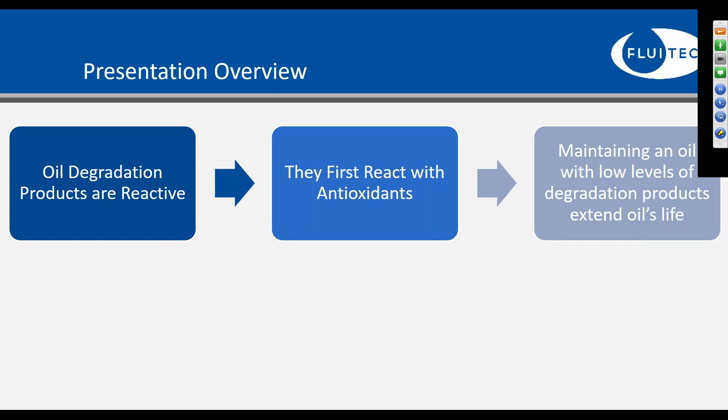Predominantly, we first see these degradation products reacting with antioxidants, and so the premise here with my hypothesis is that if you are able to maintain an oil with a low level of degradation products, you should be able to extend the life of the oil. So that's kind of the hypothesis that I'll work through. What I will present today is a little bit about oxidation and how it creates radicals, and a little bit about the chemistry and degradation of varnishes, sludges, and other deposits that are formed.

Talk a little bit about bleed and feed and some of the impacts that we see with these reactive products. And I'll end this with an experiment that we did where I tried to at least conclusively show that there is a reactive nature to these oil degradation products here as well. So, all right, without further ado, we'll get into this.

To start off with, why do we care if oil degradation products are in fact reactionary? And I think the main reason is that if you have oil degradation products, varnishes, sludges in your fluid, and it's shortening the life of the oil, then there's a pretty solid economic impact that it can have on your bottom line.

So I have a couple of quick case studies to review this, and I think the first time that this really became evident to me was many years ago. I was working on a system on a large ship that uses a controllable pitch propeller, and this is a pretty complex lubrication system that both steers and propels large ships.

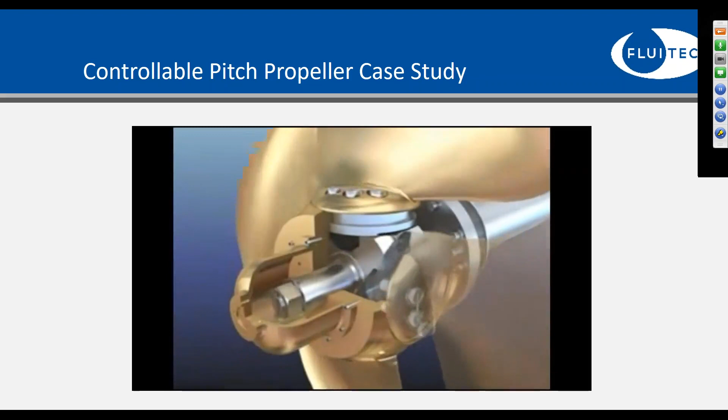And so in this case, the oil was an R&O oil, fairly unique chemistry. There was also a little bit of an EP package in this as well. But the oil was changed every time the acid number hit 0.2. And so a brand new system, the ship fresh out of the dry dock, the oil lasts for 5 years. They change the oil out. The next charge of oil lasts for 3 years. And then the next charge of oil lasts for a year.

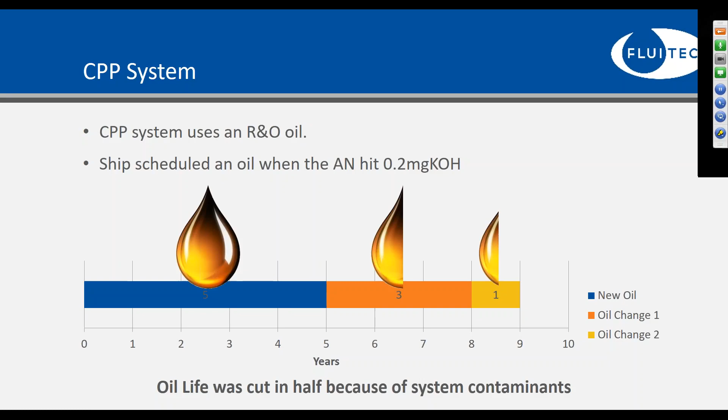And so clearly there was some concern that, right off the bat, this oil should be lasting a long period of time, and now it looks like there's a half-life. Every oil change, the life of the oil is basically cut in half. And then what was revealed is that there was no maintenance done whatsoever in between oil changes, and basically they were putting nice fresh new oil into a pretty dirty system with lots of deposits. And so this was maybe the first time that I came across this.

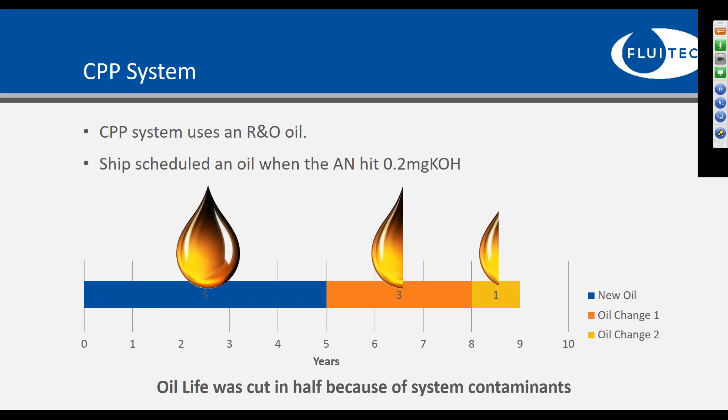A more recent case study in a large frame gas turbine where the oil was clearly at the end of its life. Typically in turbine oils, when the antioxidants or the oxidative stability measured by RPVOT gets down to 25% of new fluid levels, that typically is a sign the fluid's reached the end of its life. And so you can see here the antioxidants, in this case the phenolic antioxidants, 28%. We're getting pretty close to the end of the life of the fluid.

The varnish potential, measured by the MPC, is fairly high. 58, I would say, is certainly in the critical range and is somewhat alarming. Foaming characteristics: in a turbine, typically when you have foaming of greater than 450 milliliters, that would also be considered condemning. So even RPVOT was approximately 25% of the new fluid. In fact, if we compare to the new oil, the new oil had an RPVOT of about 1,600 minutes. So in this case, they dumped the old oil and recharged it with brand new oil.

1 week after the oil change, the phenolic antioxidants are at 74%. And the MPC is also rising and is much higher than should be expected after a week. Foam levels are higher, even the RPVOT has gone down. So in this case, the plant did no clean out of the reservoir or flushing of the system, and basically we're dumping fresh oil into a pretty dirty system, and you can in fact calculate how much it costs to make this whole oil change.

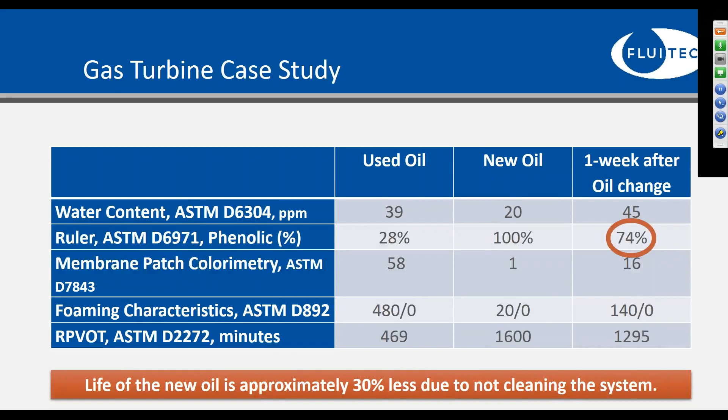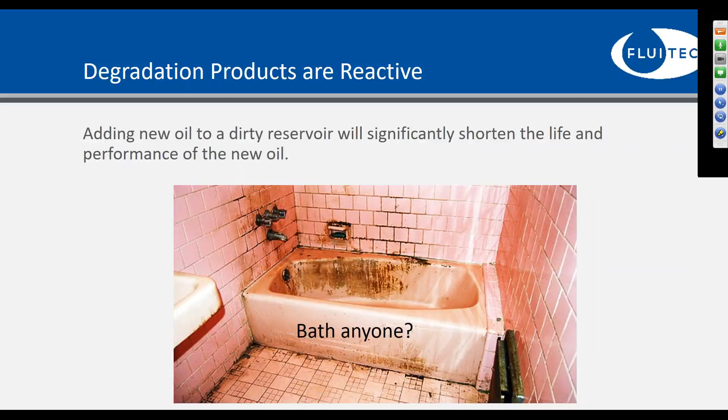So I think this is one of the reasons that we wanted to better understand and study this a little bit more. One analogy that I often use is that you wouldn't want to take a bath in a dirty bathtub, and clearly it does not make sense to put brand new, fresh turbine oil chemistry into a dirty system, especially when we see there are reactionary byproducts as well.

All right, so a couple just quick case studies here to start things off. We'll talk a little bit about oxidation. So now I'm going to see if I can kind of prove out this theory that these degradation products are in fact reactionary. I think you'll see here there's lots of observations we have, and theoretically there should in fact be the creation of radicals or these reactionary products as the fluid degrades.

So if we just look at oxidation, which is the predominant mode of aging and failure for most industrial oils, if we look at just the basic chemistry behind oxidation, you can see all of the various different products that are formed. Many of these are in fact radicals. Free radicals are typically unpaired electrons that have a very, very short life. In normal oil analysis, you're not able to identify a lot of these.

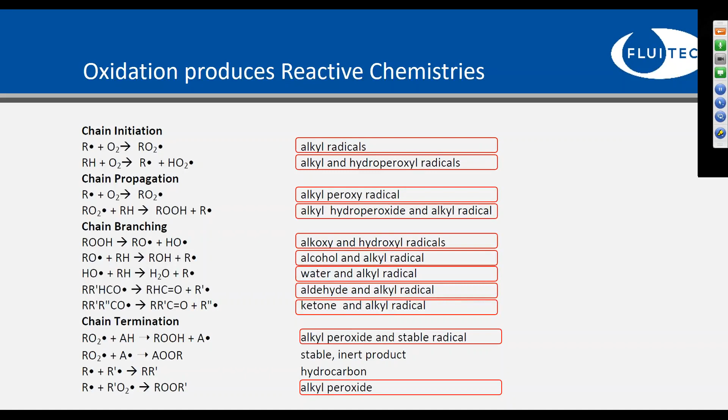Some of these radicals are more stable and can actually reside in the oil for an extended period of time. Some radicals are so stable that you can actually measure them with some used oil analysis tools like infrared analysis. But in most cases, free radicals have a really, really short life. So one way of determining whether or not there are in fact free radicals, or this is just a theoretical academic exercise here: can you actually measure free radicals in oil?

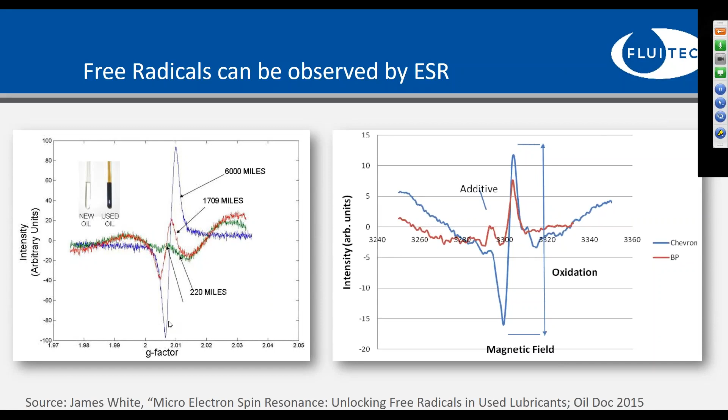And as you start to age the fluid and there's more miles on the fluid, you see at 6,000 miles, there's clearly some free radicals here that are able to be detected. So free radicals do actually exist beyond the academic exercise of understanding the process of oxidation. They do actually exist in oil.

So let's talk a little bit about some of the deposits that we typically see in lube oil systems and understanding whether or not those may be reactionary. So in order to do that, we have found that there's a lot of value. One piece of advice that I'd like to share that we always discuss with our customers: anytime you ever have an opportunity to get inside your lube oil system during an outage, it represents a tremendous opportunity to see what is going on in the system.

Unfortunately, in most cases, you can't actually see lubricants working and functioning. You can't see the wedge that it builds to separate moving parts. During outages, when you have an opportunity to get inside a system, photograph a system, make observations, there's all sorts of things that you can detect. And often, if there's accelerated oil degradation, you'll find the evidence of that through deposits that are in the system.

And these deposits can come in a very wide range of different shapes, sizes, consistencies, colors, but if you have the ability to capture and collect a deposit, there's a lot of value that can be derived from analyzing that. And certainly TestOil has a sophisticated analytical program to basically dissect and determine the chemistry of the various different deposits you may find. Typically, when you are doing deposit analysis, we like to think of this as a method of extracting deposits either from the oil or ideally actually having a physical deposit from the system.

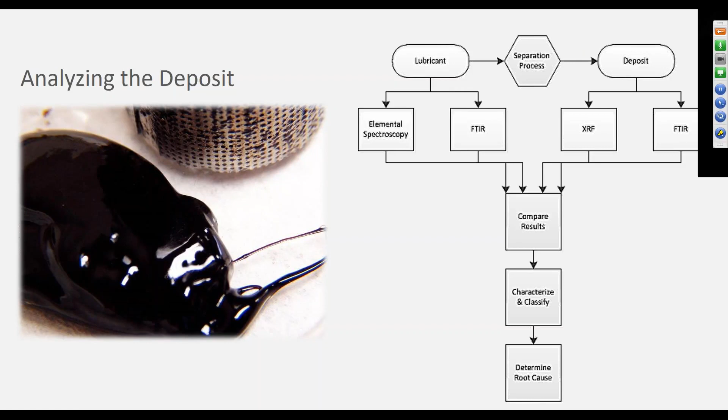Well, so that's fairly interesting, but I think even more powerful than that is that once you're able to extract the chemistry out of these deposits, in many cases, you can actually go back and determine what the source of this chemistry is.

So, for example, this little glob you see on the left-hand side of the screen, this is something that we would refer to as a thermoplastic. It's a really cool type of deposit that if it's cool, it's solid. If you heat it up, it will melt and turn into a liquid, but this solid piece here, if you actually just drop that little piece on the floor, it could actually shatter like glass, and it really behaves like a thermoplastic. This is a type of deposit chemistry that we typically see, for example, in spark-derived lubricant deposits.

If there's a very high amount of spark discharge, it would make this fairly unique chemistry that we haven't seen from other modes of degradation. So just to let you know, this is a powerful tool to not only say we have an organic deposit that's come out of the fluid that looks and behaves like a thermoplastic. Well, we also now know that it's derived from spark discharge, and there are known ways of being able to remove spark discharges that may happen in your lube oil system or in your filter system. So it actually allows you to go back and correct some of the root cause of this.

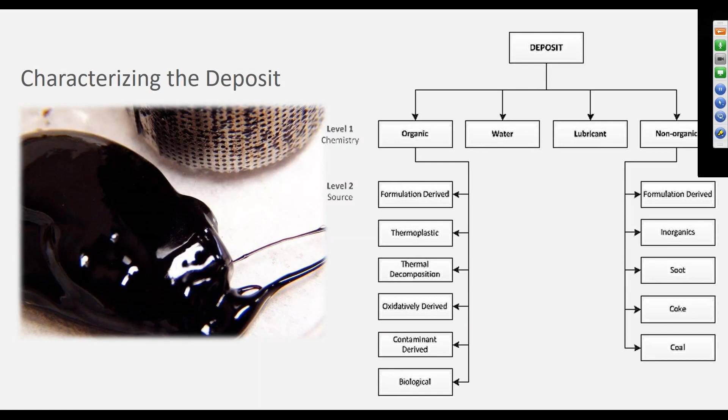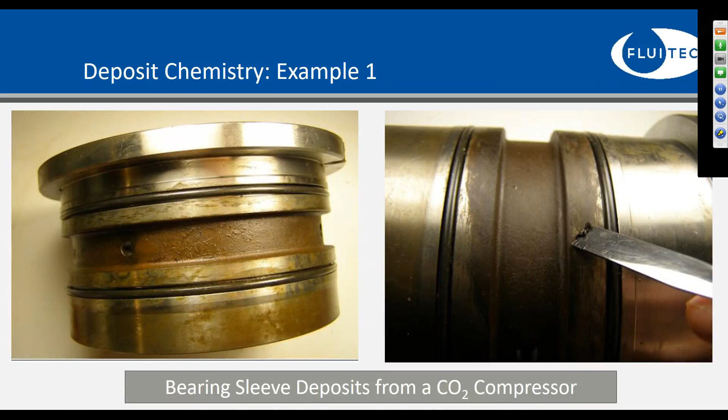So just a quick overview on what we do for deposit characterization, but based on this, we have looked at many types of deposits in the field. And so I have a couple different examples here. Here's a bearing sleeve from a CO2 compressor, and if you look at the organic components of this with infrared analysis, you can see some fairly interesting things. So first of all, just a quick overview of infrared analysis. This is just a tool, a very useful tool to look at the molecular fingerprint of the oil, or in this case of the deposits.

And essentially what we're looking at here is the chemistry on the x-axis and the amount of chemistry on the y-axis. And if you are not an infrared spectroscopist and are just looking at this, you can just compare these various deposits and see, well, we got a little dip there, matching. The red line is dipping at the same spot as the black line. You can get an idea that there's a lot of similar chemistries going on here.

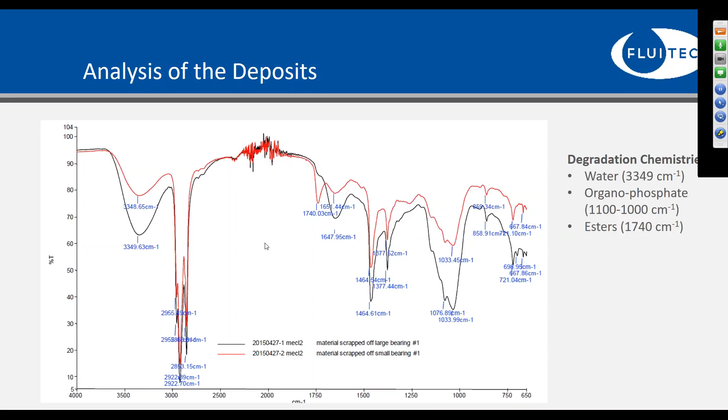So some of the predominant chemistries we see in this particular deposit, we have some phosphates, some esters, and we have some water. And it doesn't look like a watery sample, but it's amazing. Almost all deposits that we see show some evidence of moisture. Moisture, of course, can be a reactionary product and can, in fact, accelerate oil degradation. So, in fact, this is suggesting that there are some reactionary components in this deposit here.

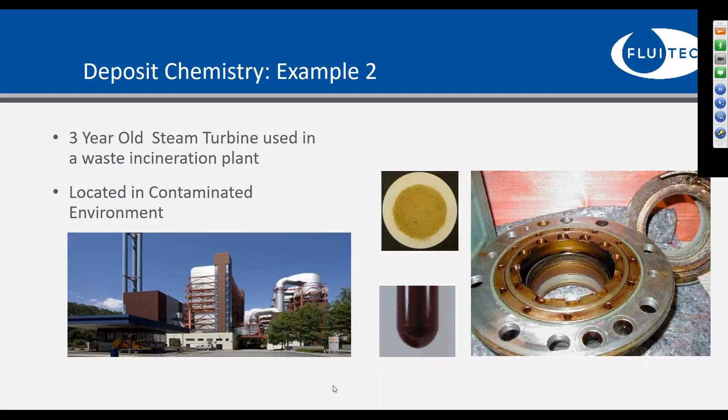We look at another example. This is a three-year-old steam turbine in a waste incineration plant. There's a lot of external contaminants that can migrate into the fluid here. Lots of deposits that we saw on the bearings. Elevated MPC patch as well. The ultracentrifuge showed some high level of deposits. At the chemistry of these deposits, lots of acids. Esters is a form of degradation, but these carboxylic acids, if you go back to the process of oxidation and all of the different byproducts that are formed, carboxylic acids are a key component that can certainly cause accelerated fluid degradation and can act as a reactionary body.

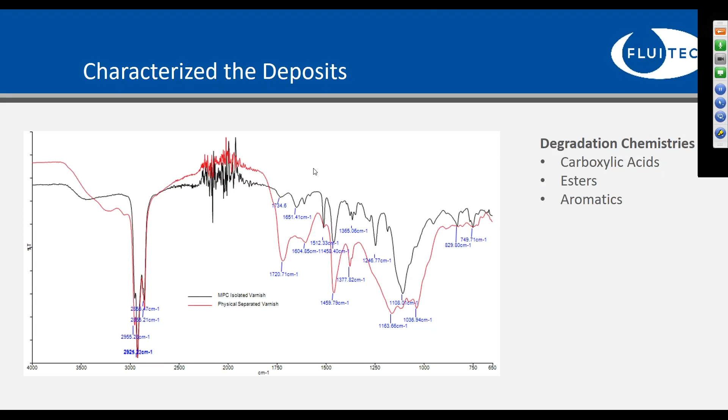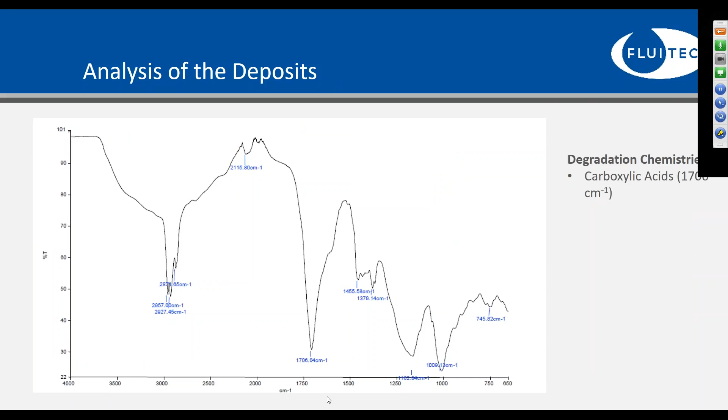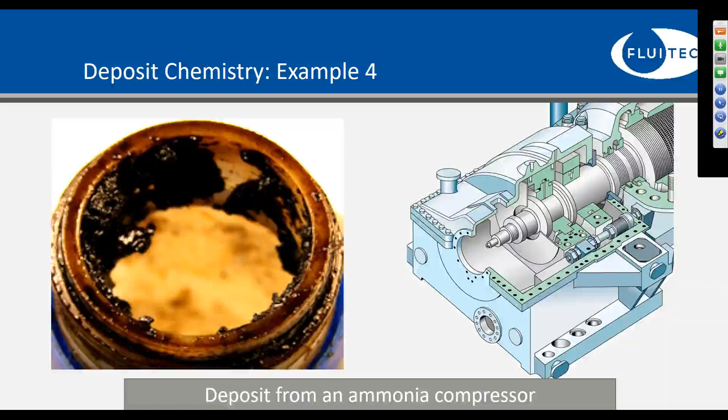So this is interesting because not only do we see this in ammonia compressors, sometimes we may see this in steam turbines when you have steam that may accidentally leak into a steam turbine oil. Some of the chemistry that's used to maintain steam can decompose to form ammonia. So it's another potential source for ammonia to get into the fluid.

The interesting part of this chemistry is that you can have all sorts of deposits, and if they are an amide type deposit, you may not actually see an increase in MPC values. So this is a reactionary product here that actually is hard to detect and predict through normal oil analysis.

So it's, again, a pretty powerful tool to be able to identify what's causing this, so you can change both your contamination control program and also your condition monitoring program to be able to accurately detect this and predict whether or not this will become something that can impair the reliability of your plant.

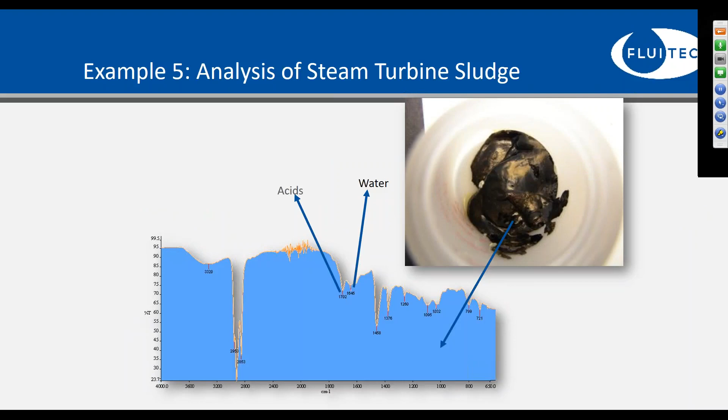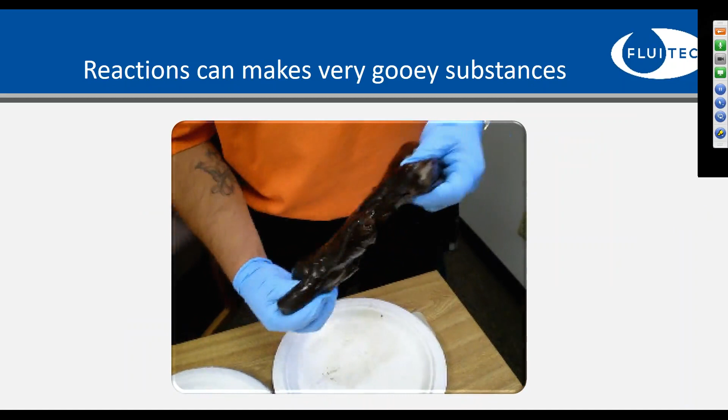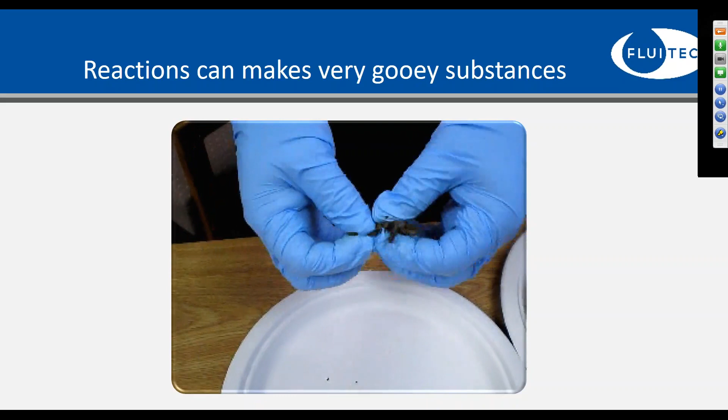All right, final example that I have. Basically, I just like showing this example because we have a great video that goes along with it. But here you see lots and lots of water mixed with oil can sometimes create some fairly unique monsters. So this is almost a whole other species; just visually this thing looks like it's reactionary, and you would not want to have that in your lube oil system.

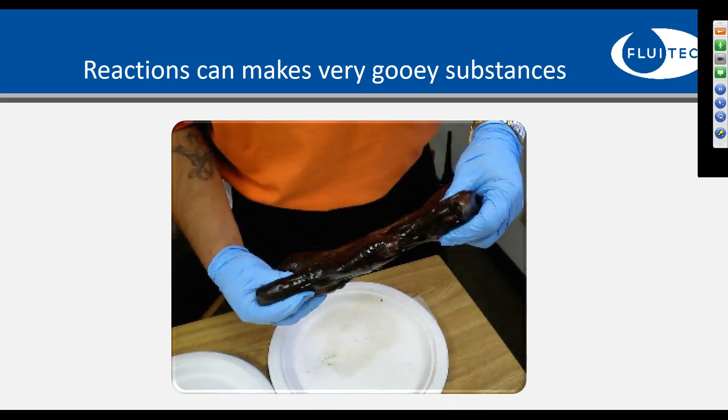So anyway, you sometimes can get these fairly interesting reactions to make some pretty interesting gooey substances like this. All right, so we are theorizing here that these deposits are reactionary. We have some observation that there are, in fact, some reactionary chemistries in the fluid. Here are some pretty interesting results, I think, from some bleed and feed experiments.

This is some data from 7 different bleed and feed results. So we have 7 different case studies. We have the phenolic antioxidants before the bleed and feed, and based on the percentage of bleed and feed, if it's a 10% or a 30% bleed and feed, you can, through some pretty simple mathematics, estimate what the actual phenol should be after the bleed and feed. And then we actually have what the actual phenols were.

And as you see, in a lot of cases here, the actual amount of antioxidants after the bleed and feed is in fact lower than what you calculate. And I think one of the key reasons for this is because there are some reactionary products in the oil, so when you put these fresh antioxidants and this fresh fluid into a dirty system, some of those fresh antioxidants are being decomposed and reacting with some of the reactionary bodies in the system.

So what I've done here on the right-hand side is I've charted the effectiveness of bleed and feed versus the bleed and feed percentage. And it's interesting that as you do a higher and higher bleed and feed, in this case 30% bleed and feed, we estimated that the phenols after a 30% bleed and feed should be coming in at 38%. And in fact, we were remarkably close. Conversely, at a 10% bleed and feed, it was significantly lower.

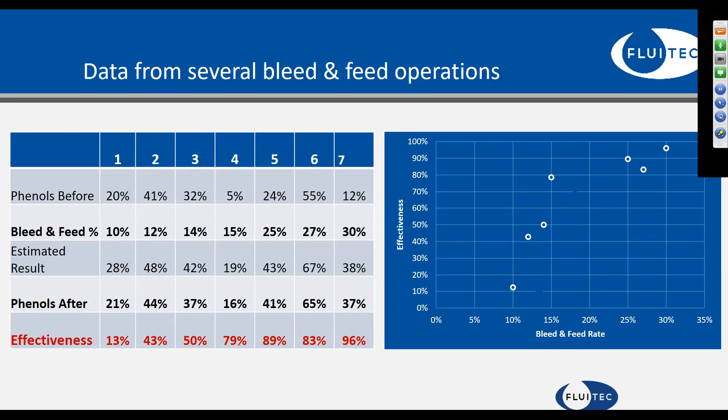And again, we have a couple case studies here at the very beginning, and also these bleed and feed examples, where we are certainly observing that fresh antioxidants may be more quickly consumed when introduced to in-service oils or into a dirty system. So if you have a lot of reactionary products in the oil and you're trying to extend its life through bleed and feed or additive replenishment, the effectiveness is going to be significantly less. And also, the higher the percentage of bleed and feed, the more effective it is.

All right, so we're moving on here to the laboratory world, and I'm going to show some data on us trying to better understand some of these reactionary components. So what we're doing here is we're looking at the antioxidant levels. So in this case, we have I think 40 used oil samples that we have in the laboratory, added a certain amount of raw antioxidant chemistry to 40 different in-service oils.

And then what we can do is, based on the RULER test, which is measuring the effectiveness of the antioxidant concentration, we can guess or predict where these antioxidant levels should be. And again, instead of looking at a percent of new, which you may see sometimes in RULER tests, we've converted all this to an antioxidant concentration. So here we have a whole bunch of samples that we've added antioxidant to in the lab, and this is where we expect the antioxidants to be after the addition. So somewhere between 0.5 and, say, 1.5%.

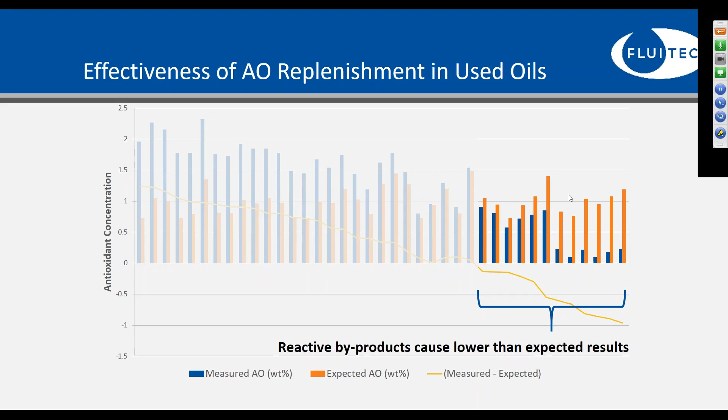And then in this case, we have some anti-synergism happening. And since we're dealing here with all in-service oils, a lot of this can be explained by reactionary products that are in the oil that lower the effectiveness of adding fresh antioxidants to this in-service oil. So you see we have several examples here.

All right, so that's one lab data here, and ultimately we wanted to do an experiment that could really definitively prove that these degradation products are in fact reactionary. So what we did is we determined the antioxidant levels of a whole bunch of in-service oils. They all had high varnish potentials, so all of the MPC values were greater than 40. We measured the antioxidant chemistries, both the amines and the phenols, with RULER, and then converted that to a RULER concentration just to make it easier to read the data. And a known amount of amines and phenols were added to each sample.

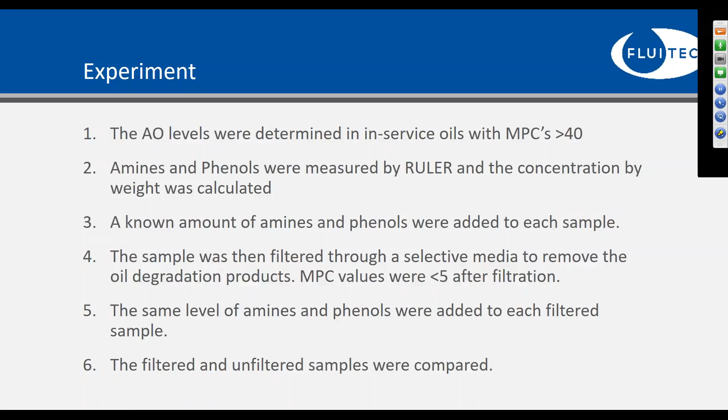Then what we did is we filtered the oil. We removed all the degradation products. The MPC values were less than 5 after our filtration process, and repeated it. So theoretically, our premise is that if in fact we add fresh antioxidants in the lab to clean oil, you should expect a higher effective rate. Okay, so let's see what the data looks like.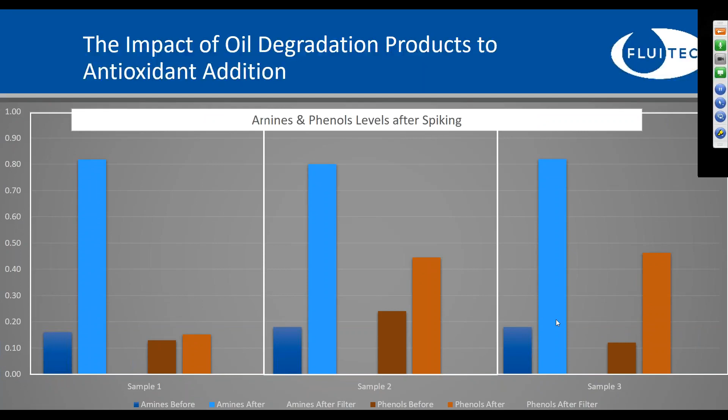So we went through, did this effort to try to conclusively prove this. I would say our laboratory experiment here didn't conclusively show that all degradation products are in fact reactionary, but we certainly think that some oil degradation products are reactionary. Certainly our laboratory test data is suggesting that. Observationally in the field, we see this all the time.

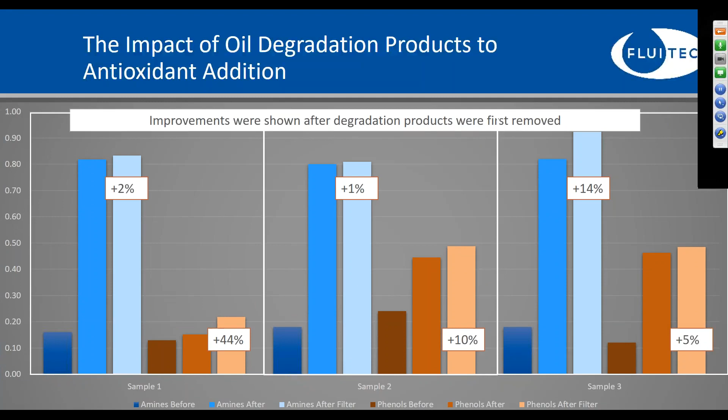So we did not do the analysis to conclusively determine this, but I would guess that if you have some spark discharge, or I showed the picture of this thermoplastic type material, we find that is actually not as reactive as some other more radical or peroxy type radical degradation products that may be derived through oxidation. But again, we did not conclusively test for that in these 6 samples. So good question, and very insightful question, and I wish I had conclusive data to answer that for you.

Okay, I have one more for you, Greg. This is from Eugene in Florida. Eugene is asking if you can suggest a way to remove sludge and varnish from a system between oil changes.

Okay, so I think that's a very important point, and one of the key points of this webinar that I am hoping made it through to you is that there is a lot of benefit in decontaminating a system between oil changes, and putting fresh oil into a dirty system is just not good for anybody.

It's not good for the oil supplier because their brand new beautiful formulation, this great product that's been made just for your system, suddenly a week after it's been put in your dirty system, it has lower effectiveness. It's not good for the end user. So decontaminating a system between oil changes provides a tremendous amount of value.

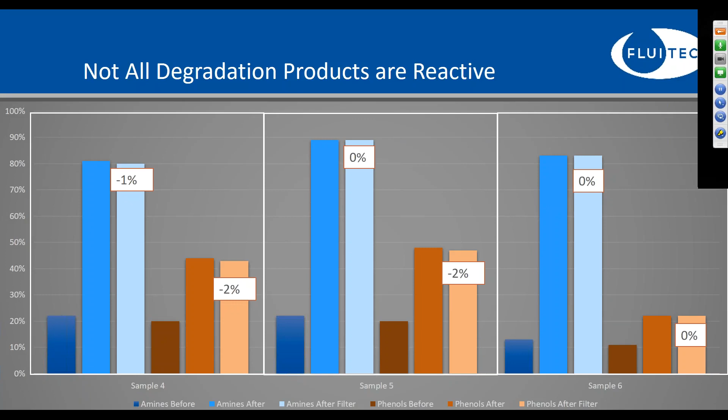Greg, I have several more questions, so I'm going to keep going through these if we can. I might have to leave some of them for you to answer via email, but let's try one more. This is from Anthony, and Anthony is asking, how were the samples filtered in your experiment? Can this same filtering be done outside of the lab on oil in our reservoir?

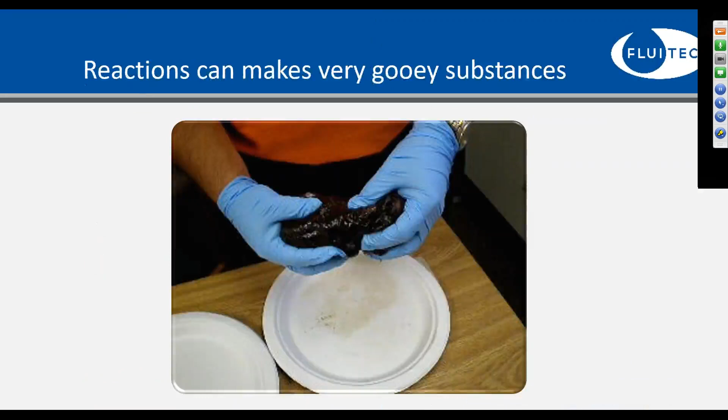So in the case of primary amides, there's a couple things to be aware of. The first thing is that there's two necessary components that you need in order for an amide to be created, and so I'm just going to pull a slide up here, but one of them is carboxylic acids, oil degradation products. The other is ammonia. So if you have both of these under the right conditions, they can form this sludgy material that comes out of the oil really quickly and doesn't allow MPC to be measured.

So what can you measure in this case, and also what can you do to correct and predict or eliminate this potential mode of degradation? So ammonia, you just may not be able to do anything to impact ammonia ingression. If you have an ammonia screw compressor, ammonia is just going to get into that oil. There's nothing you can do about that. In the case of a steam turbine, if there's steam chemistry that may migrate into the in-service turbine oil, there's nothing you can do to eliminate steam leaks from ever happening.

Carboxylic acids, however, are a component that you in fact can measure in an oil analysis program, and in fact this is a chemistry that you can effectively remove. So carboxylic acids are a form of oxidation. It's an end product of oxidation, and if you have these carboxylic acids, you can in fact measure their presence in infrared analysis. If you work with a lab that has sensitive infrared capabilities, 1714 typically is where this chemistry will pop out, so that can be one mode of measuring this.

There's also varnish mitigation technologies that you can use to actually remove these degradation products. You may look at changing your oil much more frequently, or doing bleed and feeds more frequently to ensure that this level of carboxylic acids doesn't accumulate. And if you can eliminate these degradation products from being in the oil, then you're essentially eliminating this potential pathway for this primary amide chemistry.